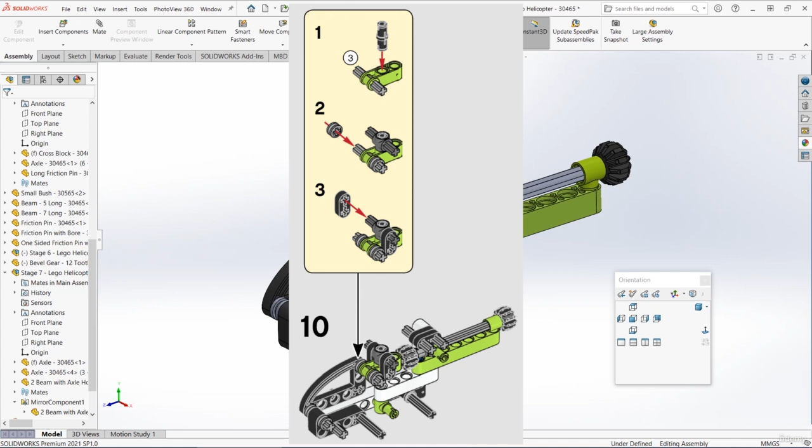We can now make stage 10, and first we're going to make the small substage. First, make sure you've got everything that you need open. So we've got the axle, we've got the cross block that's 3 long, we've got the friction pin, we've got the small bush, we've got the axle with bore, and then we've got the 2 beam with axle holes.

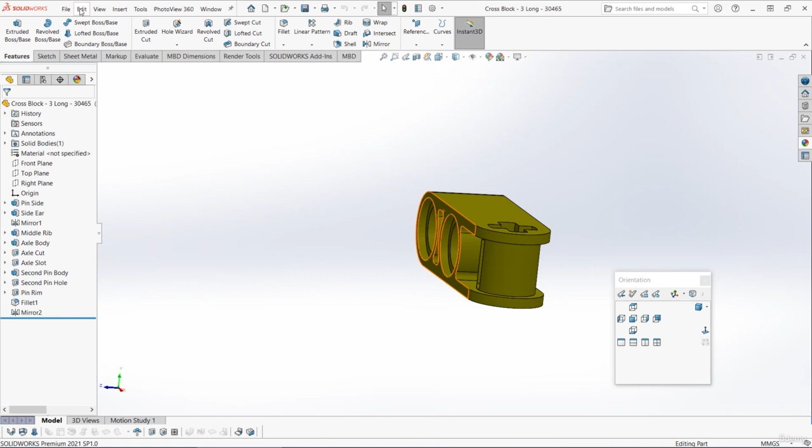Now it doesn't really matter too much which you start with. I'm going to start with this one, just because it's right in the middle of the assembly. So I'm going to go to File, Make Assembly from Part. I'm going to pin the Insert menu open because we've got quite a few parts to insert. So first I'm going to insert that cross block 3 long. And I'm going to rotate it around to the correct orientation like this.

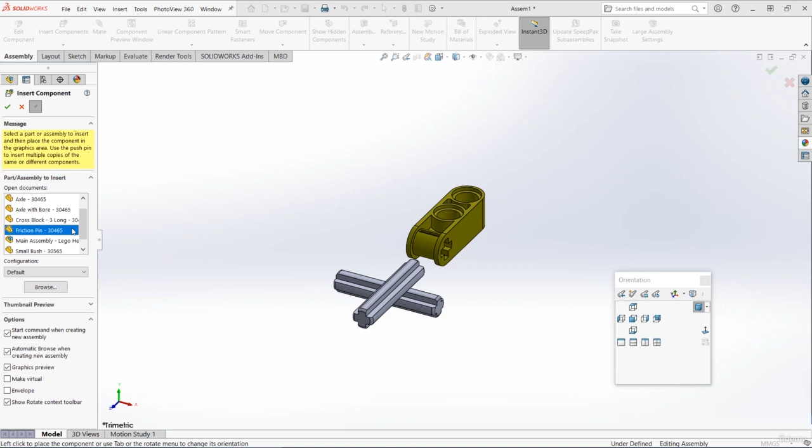Then I'm going to insert all of the other components at this stage. Firstly, it's the small axle. Then next it's the friction pin. I'm going to insert that new axle with bore that we just made. Also the small bush. And then finally, I'm going to insert that 2 beam with axle holes. And then you can close the Insert Components menu.

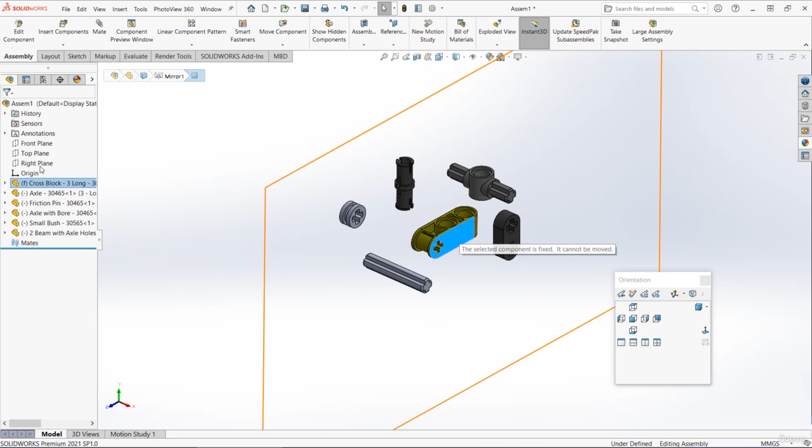Now before I actually mate anything, I'm going to check that first component is lined up properly with the assembly planes. So I'm going to go to a top view, and I'm going to hover over the planes in the assembly. And we can see that it's offset from the assembly planes. So to fix this, I'm going to right click on the part in the parts tree, and then press Float. We can now move it around to wherever we want.

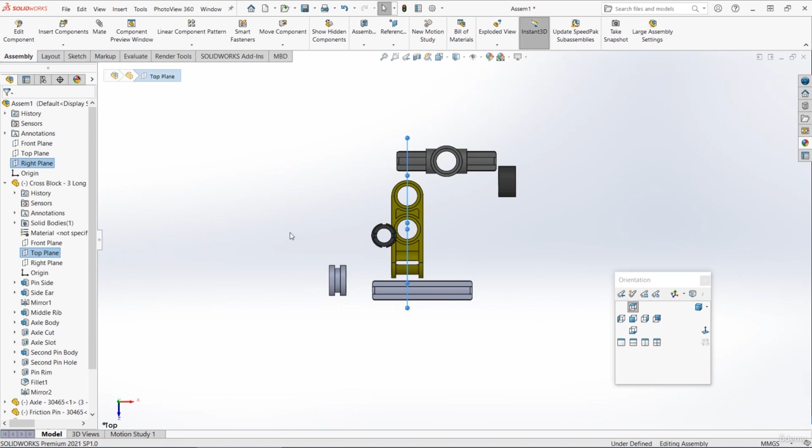I'm going to expand that first part, the crossblock part, and find the plane that goes down the middle, which is this one, and then I'm going to line that up with the assembly plane. Then I'm going to do the same for the remaining 2 planes. So I'm going to get the front plane here and line it up with this plane in the part. And then I'm also going to get the top plane and line it up with this one. So now that crossblock part should be fixed to the assembly in the right position.

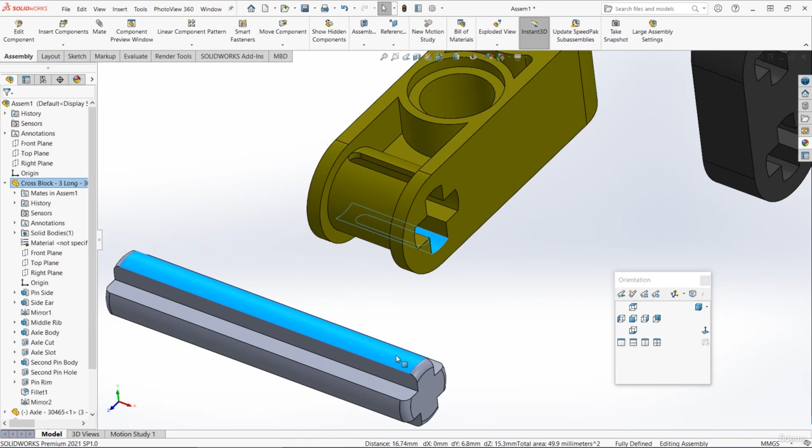Then it's just a case of mating all of the other parts in place. I'm going to start off with the small axle. I'm going to make that concentric with the hole at the front, and I'm going to lock the rotation. And I didn't quite lock that one. I think I clicked the button twice, so I'm going to expand the mate and I'm going to lock it here. I'm then going to center the axle by getting the plane that goes down the middle and lining that up with the plane that goes down the middle of the assembly. And when we do things like this, you can really see the value of using those mid-plane extrudes.

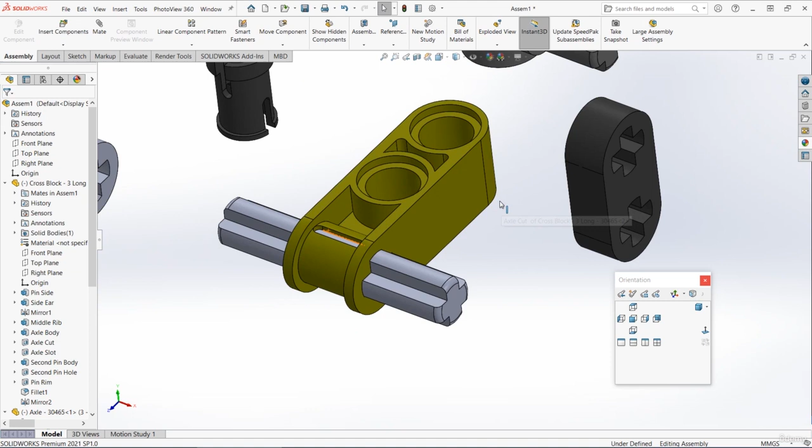Next, we can make the friction pin lined up with the hole. We can lock the rotation, and then I can drag it down to the correct place, and I'm going to make the bottom of the friction pin and the bottom of the beam coincident. Next up, we can add that new part, so we can make that concentric with the friction pin on the top, and we can lock the rotation.

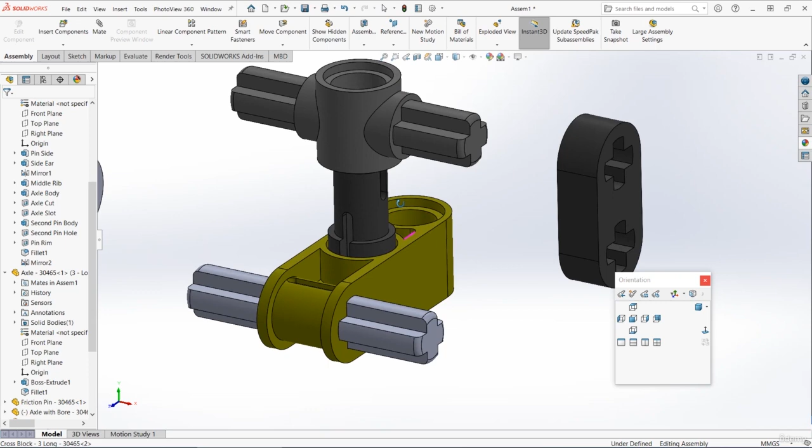For the height of this top piece, I'm going to make it so these 2 inner faces are both touching, so they're coincident. But if we look at the part, we can now see the pin is sticking out of the top. So this may cause us some issues later on, but for now we'll leave it as it is, and we might come back to that later.

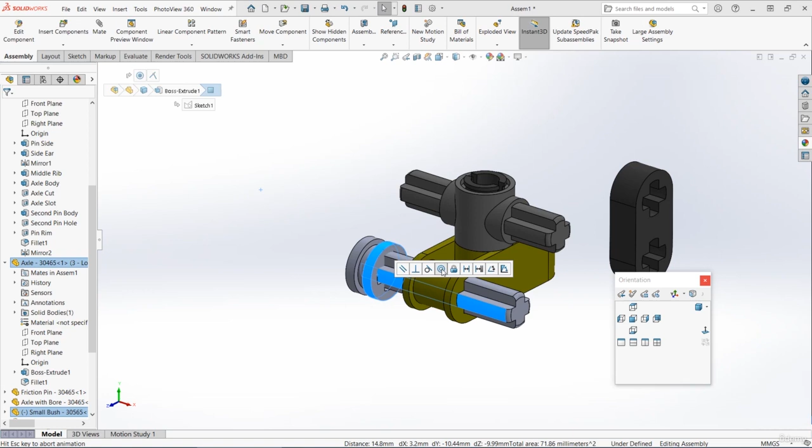Next up, we can mate the bush in place. So let's select a circular face, also a circular face on the axle, and make those concentric, and let's lock the rotation. And then let's just make the inside face of the bush and the outside face of the beam coincident.

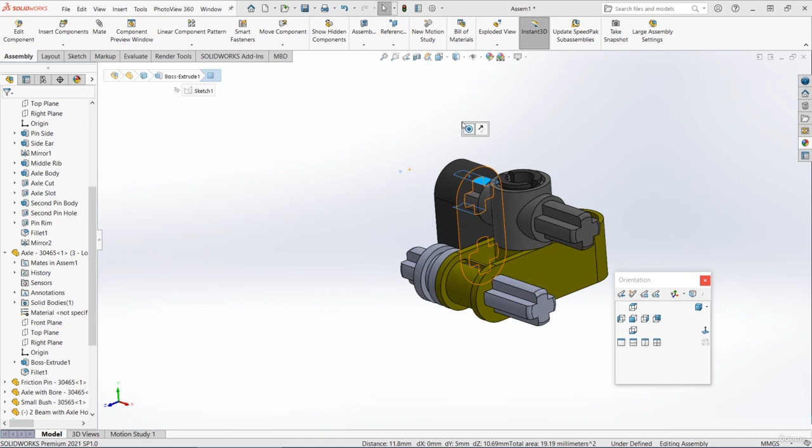And then finally, let's move the 2 beam with axle holes into place. So I'm going to get the circular face inside here and also on one of the axle connectors. And then I'm going to make those concentric. I'm going to lock the rotation. And then I'm just going to make this outside face and the inside face of the beam coincident.

So we've almost got that substage from stage 10 that we need. We just need to mirror over 2 more components. So let's choose the plane that goes down the middle. For me, this is the right plane. Also select the 2 beam with axle holes and then the bush part. And then go to Assembly, go to the drop down underneath Linear Component Pattern and choose Mirror Components.

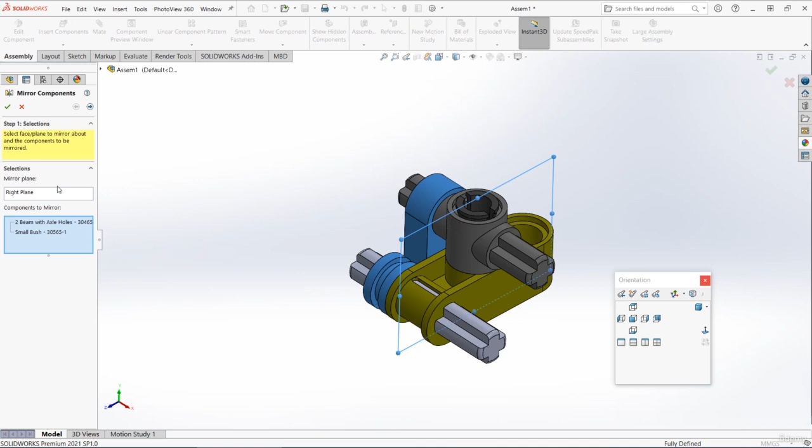So we've got the right plane selected and we've got those 2 parts selected. We can then click Next and we can see on the preview that looks right. So let's press OK, and those 2 new parts are added. And there we've got that sub-assembly created there. So let's save this and let's call this stage 10.

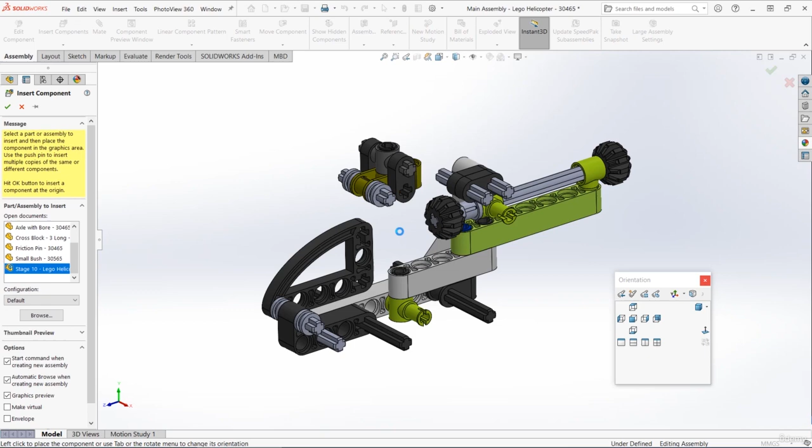We can now insert this stage 10 to the main assembly. So let's go back to the main assembly. Let's go to Insert Components, find stage 10, and then put it in the assembly somewhere about here. Then to actually mate it in place, let's select this circular face, and let's also select a circular face inside this part, and let's make those concentric. And let's lock the rotation there.

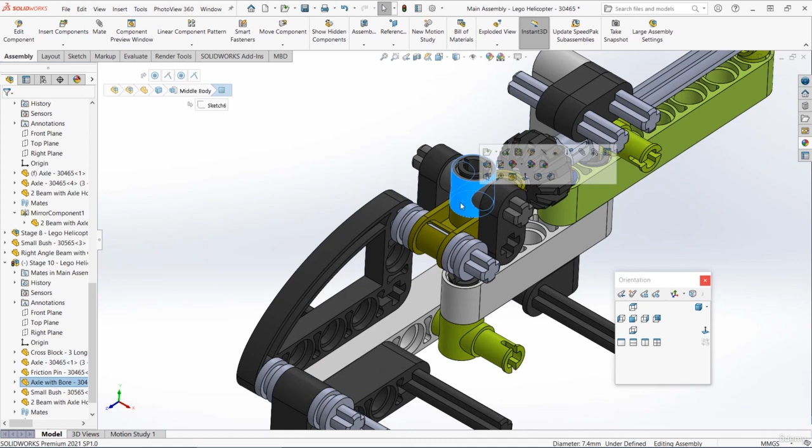And then for the left-right position, let's just make sure it's in the middle. So we could line up the outer face of the bush and this beam, but instead we'll use the planes that go down the middle of the assembly just to make sure it's definitely in the middle. So let's find the plane that goes down the middle of stage 10, and let's line that up with the plane that goes down the middle of the assembly, like so.

And now if we zoom in, we can see we've got a very small gap between these parts. That's just due to the tolerance and the way that we've measured these parts. We might be slightly off with measuring them. And there we've completed stage 10, so we can now save this. In the next video, we'll move on to stage 11, and we've only got to make one new part for that, and it's pretty similar to things we've already made.